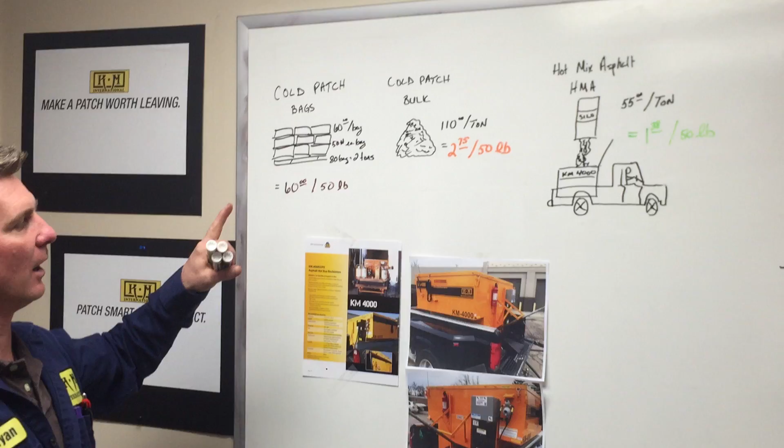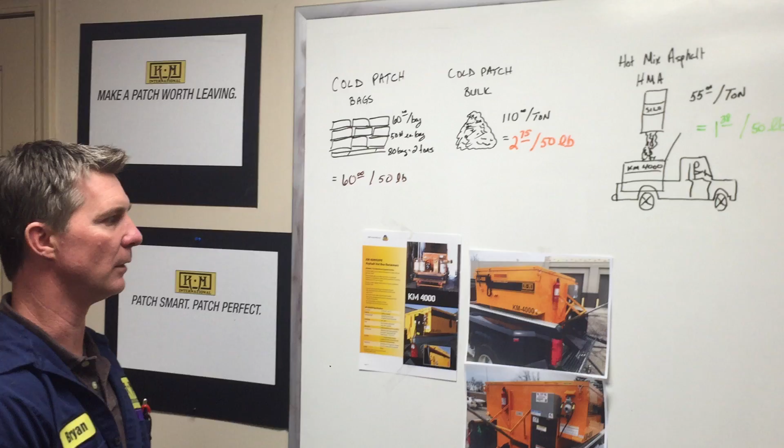Today I'll be using the marker board because 30 years ago we had chalkboards, but now we have marker boards, class. So let's start there. What we've been thinking about is how do we teach or help educate industry professionals, or people outside of the industry, about what they need to know about asphalt and how to get asphalt.

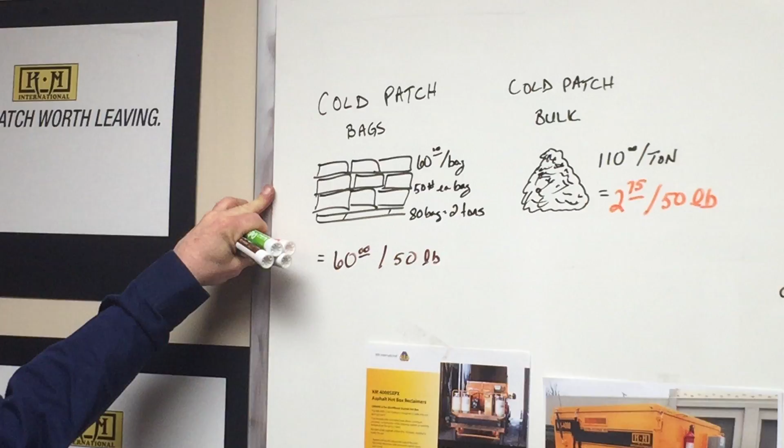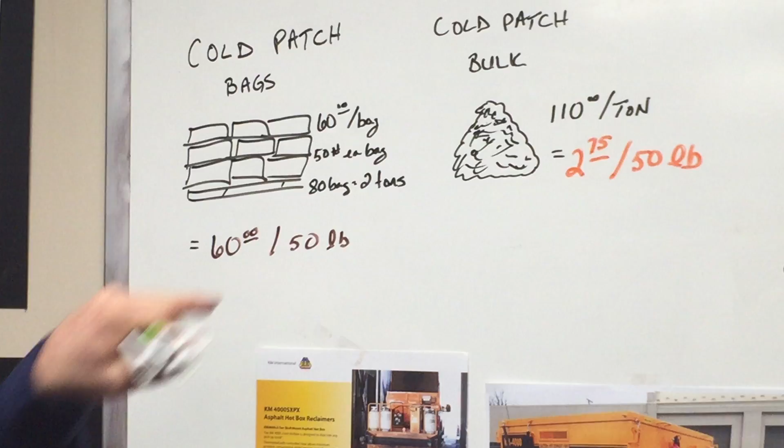Some of the basics: cold patch. Most everybody seems to know about cold patch because they sell it at Home Depot, Lowe's, and other home improvement stores. I don't want to leave anybody off the list - Menards, small hardware stores, etc. On average, a 50-pound bag of cold patch at the store costs you $60.

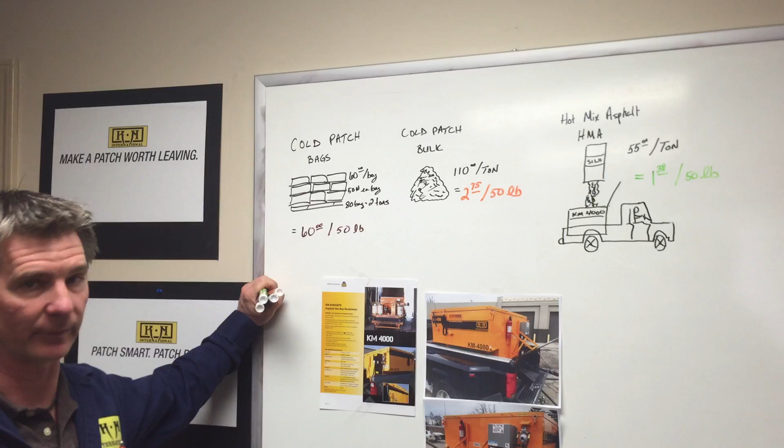Many people don't know that you can buy cold patch in bulk form at asphalt plants - that is, if you know where the asphalt plant is. Most of the world doesn't know where to find the asphalt plant, and most neighborhoods don't want the asphalt plant in their backyard, which lends itself to not being able to find it. But if you can find the asphalt plant, you can buy cold patch in bulk for approximately, here in the Midwest, $110 per ton.

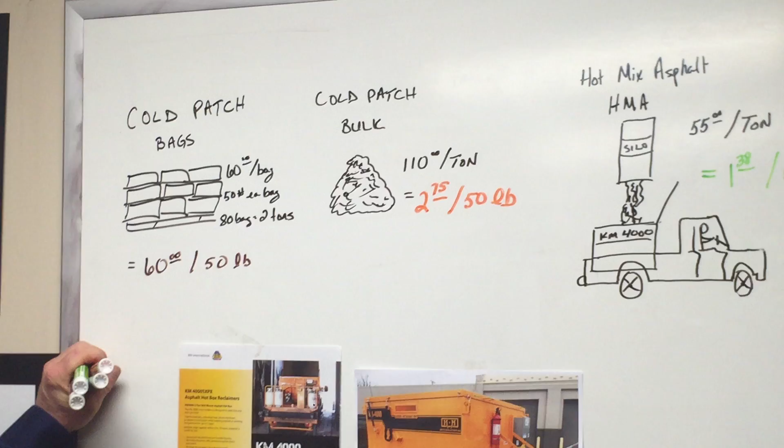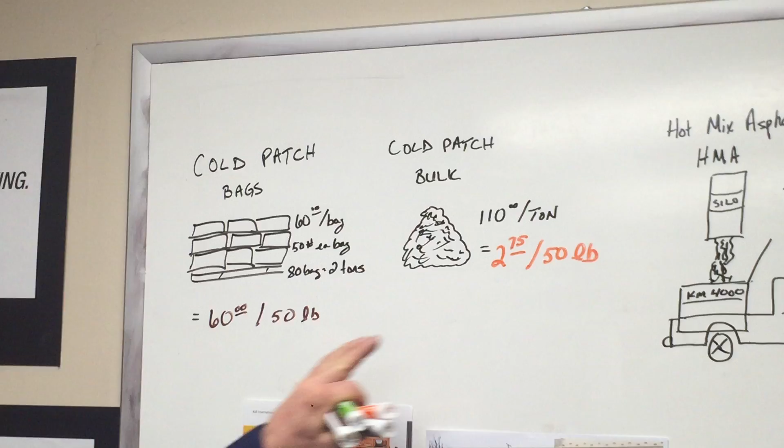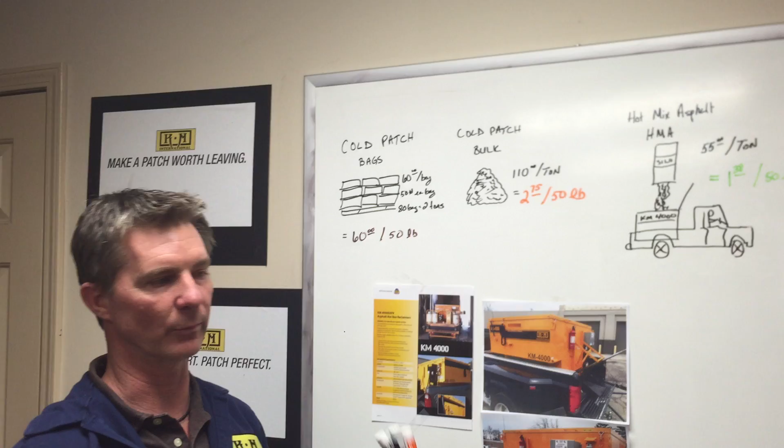We've done the math ahead of time, trying to keep it apples to apples. 50 pounds of cold patch in bulk form comes out to $2.75, significantly less expensive than paying $60 per bag. Of course it's not in a bag here, you're going to need a shovel and a way to contain it - a hotbox. Cold patch is ridiculously dirty, messy stuff. We probably all know that because we've driven through it on the highway, picked it up with our tires, and heard it hit our fender wells.

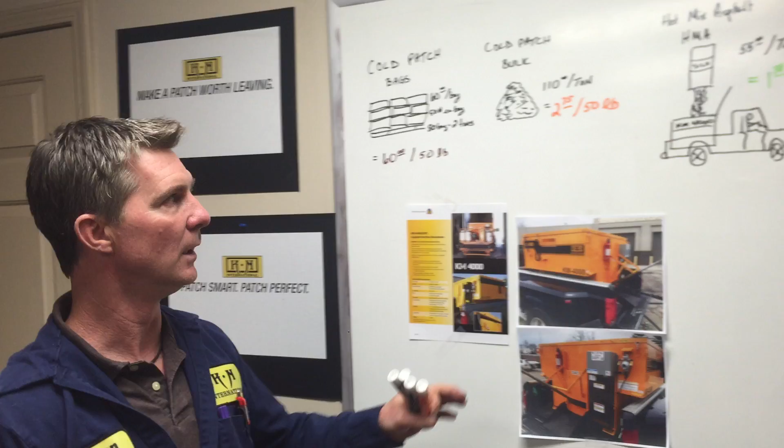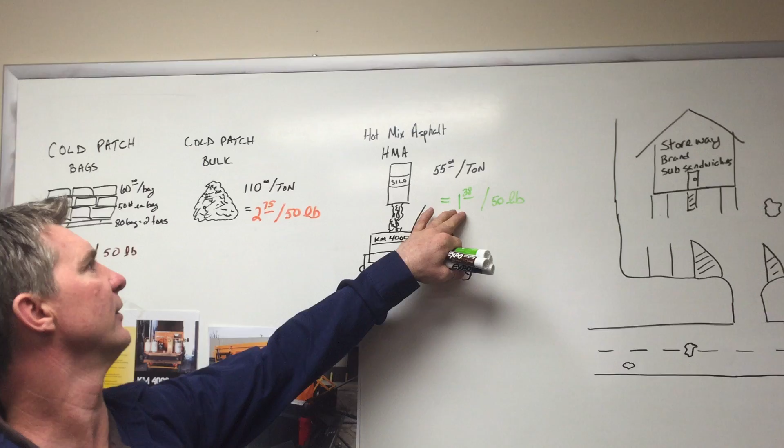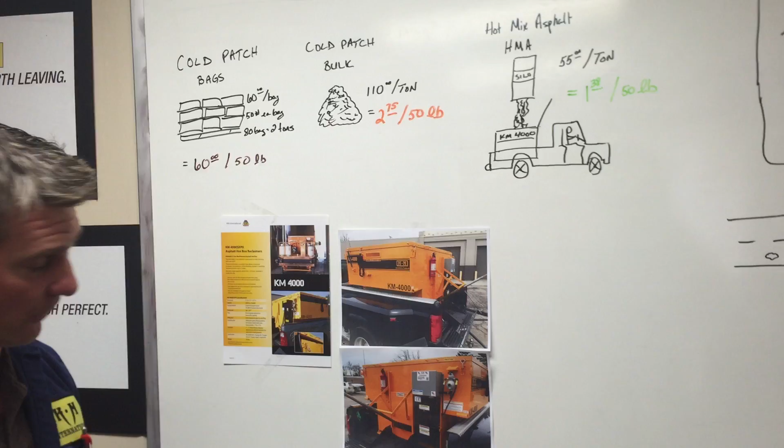As long as we're discussing dollars and cents, we've done the math. If you can find that asphalt plant, and it's running in the summertime and during the season like right now in the spring, you can buy hot mix asphalt for approximately $55 per ton, or $1.38 for 50 pounds - slightly more than half, only by half a penny, the cost of buying bulk cold patch. Again, the difficulty here is: where's the asphalt plant? Not very many people know there are asphalt plants around or where to find them. And then once I find the asphalt plant, how do I buy and haul the asphalt?

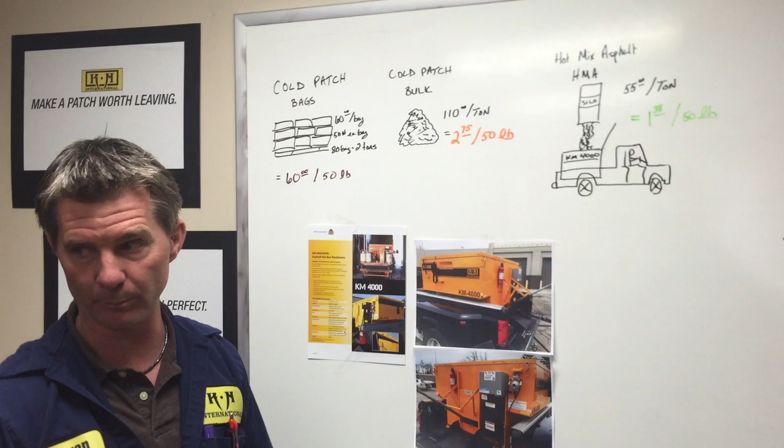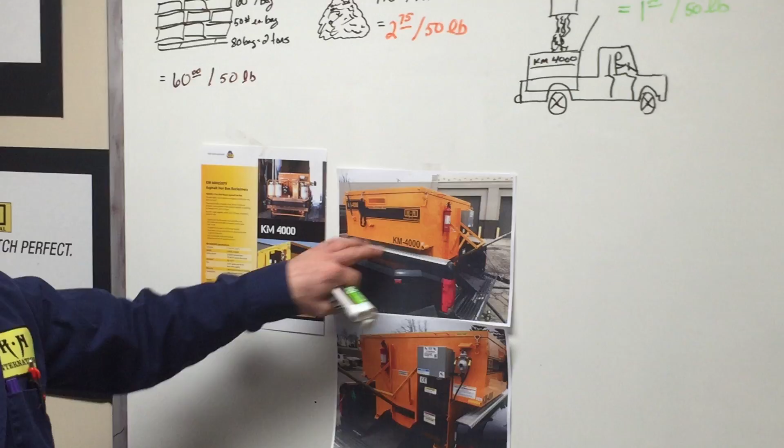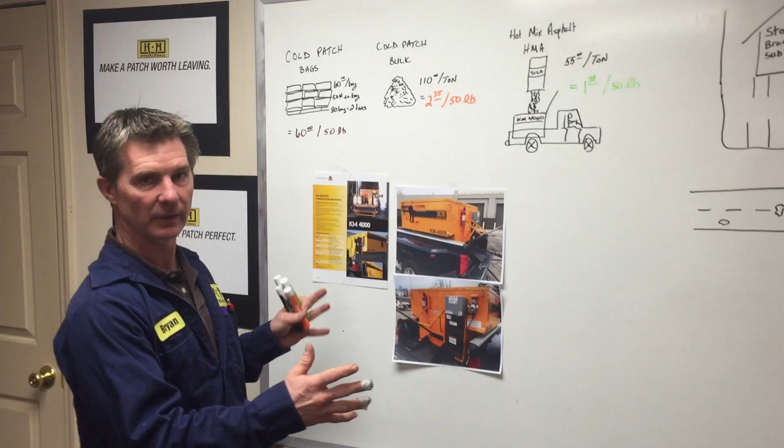Well, that's the problem that we've solved at KM International over the years. Since at least the 80s, to my knowledge, we've been building the KM 4000, a 4-ton asphalt hotbox. Amazingly enough, we failed to show the world how easy it is to get asphalt and get it to the pothole. Can I stop you for one minute, Bryan?

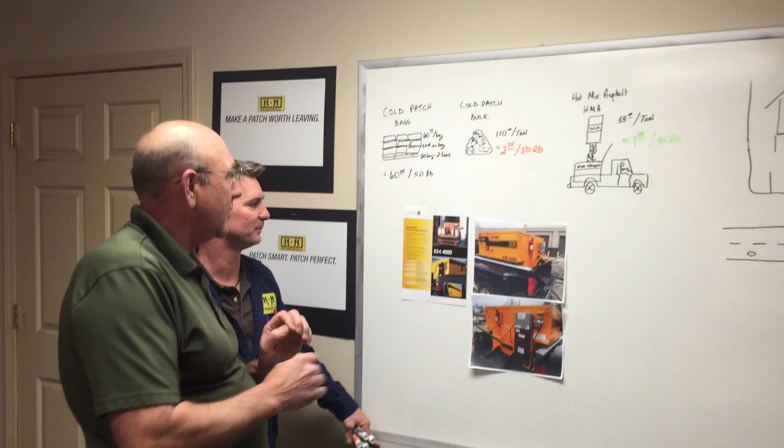Most guys will buy 3 tons if they're hauling it in a truck, use 2 tons, and throw 1 ton away. You're wasting money.

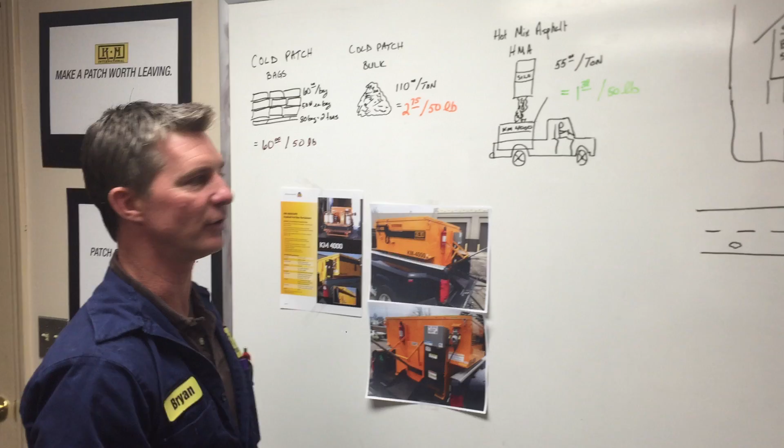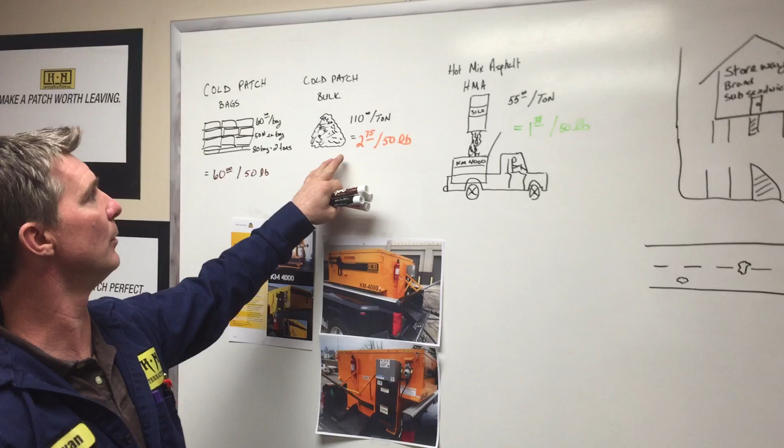So for a simple piece of equipment, our KM 4000 asphalt hotbox, which we took pictures of and put up on the board here, in a pickup truck, a man in a pickup truck with one little 2-ton asphalt hotbox, KM 4000, made here in North Branch, Michigan. We can go get our 2 tons of hot mix asphalt for $55 per ton, or if we wanted to, we could pay a little more and get cold patch and put it into that same asphalt hotbox. Either way, our piece of equipment here in our basic pickup truck gives us the opportunity in the holding reservoir to purchase and transport asphalt to a job site.

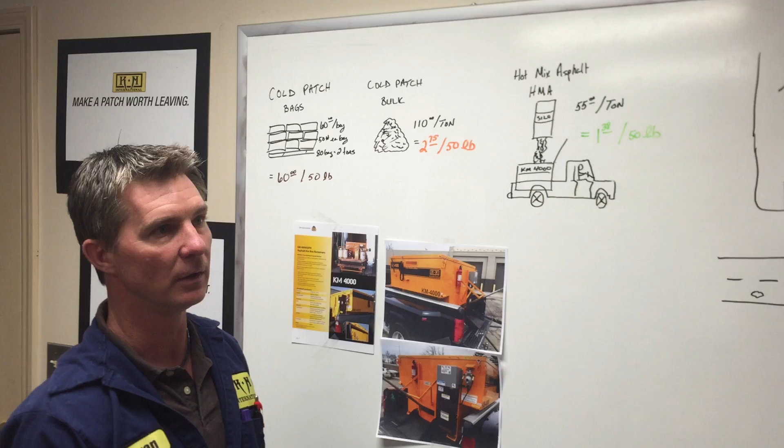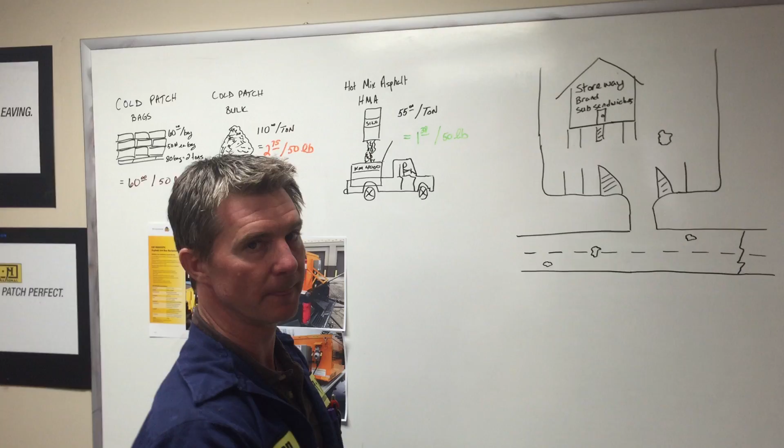So what do we do with the asphalt that generates revenue? We take our asphalt, go to the asphalt plant, purchase our asphalt, and drive over some potholes that have been filled with cold patch many times by the local authorities, counties, and states, or we drive around them.

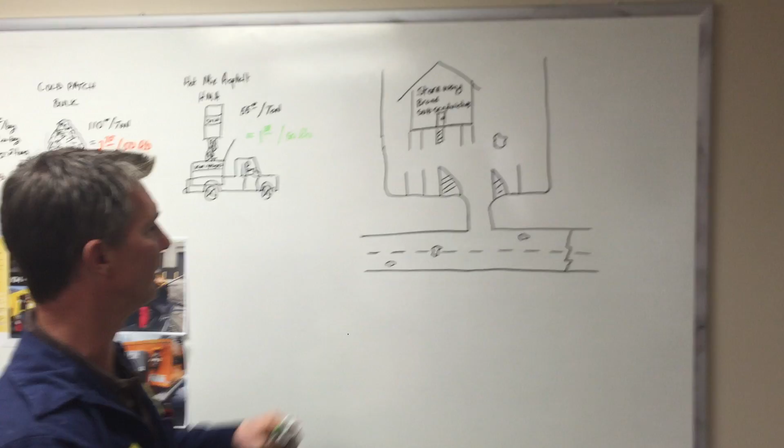We can drive down the road here. What color should I use? Black. This is our truck driving down the road, going around potholes.

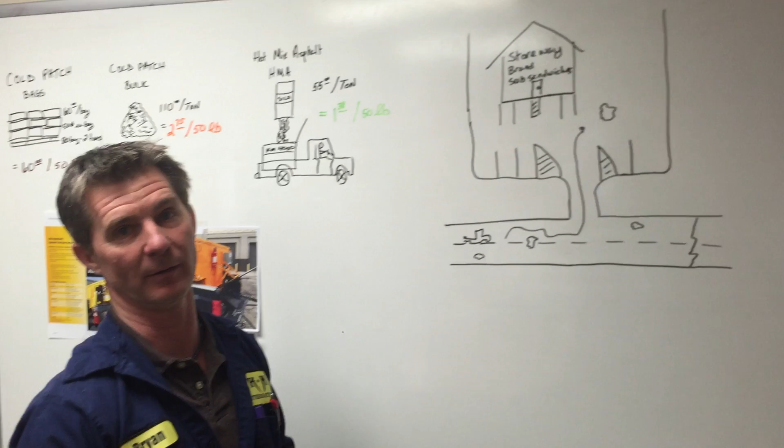And we go to one of our local stores. Here we've gone to Storeway Brand Sub Sandwiches, a very popular sub sandwich maker here in the Midwest. They make delicious sandwiches, but you can see a typical pothole in the parking lot, a job that many of us asphalt guys over the years have approached.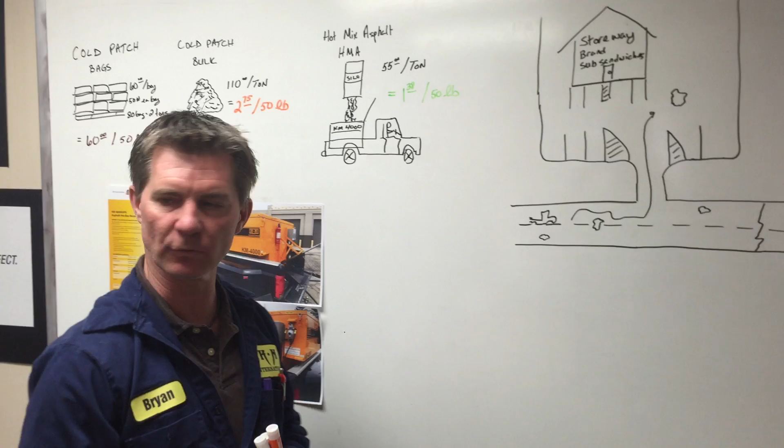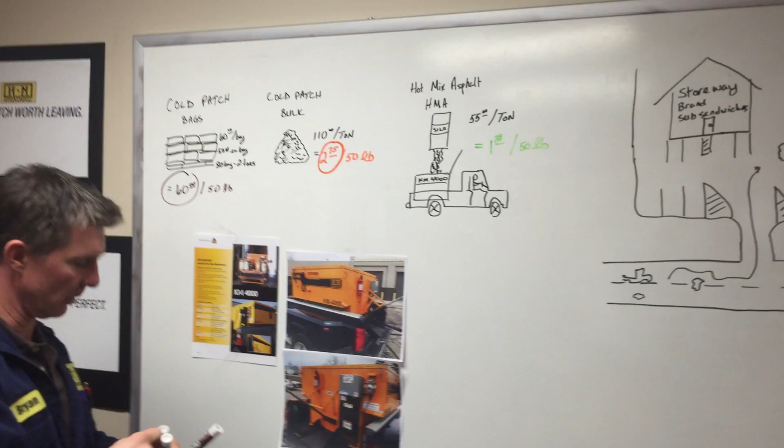To keep things simple, we're going to assume that a standard pothole, let's call it 2-foot diameter, maybe 2 to 3 inches deep, is going to require 50 pounds. One bag of our cold patch at $60, or 50 pounds at $2.75 of our bulk cold patch, or better yet, the more permanent, preferred, and least expensive method at $1.38.

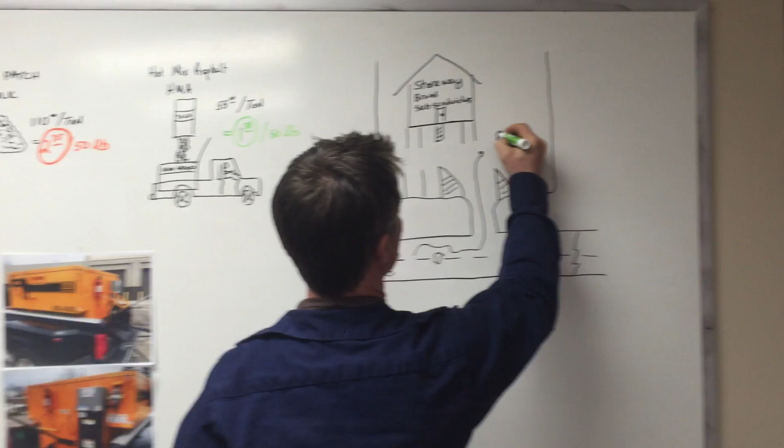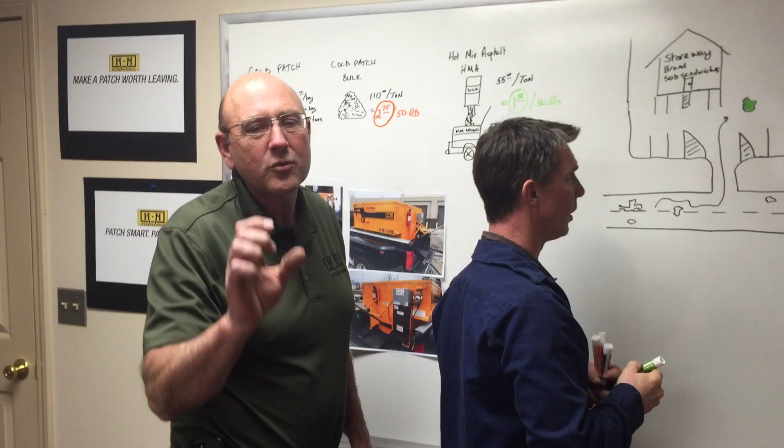We can put hot mix asphalt into our pothole here. Can I interrupt? Yeah, the preferred method is infrared, that's what we do, we sell infrared machines. But this is going to get you out of the box into the parking lot, generating revenue for $1.38 in material, plus some time and a little bit of labor.

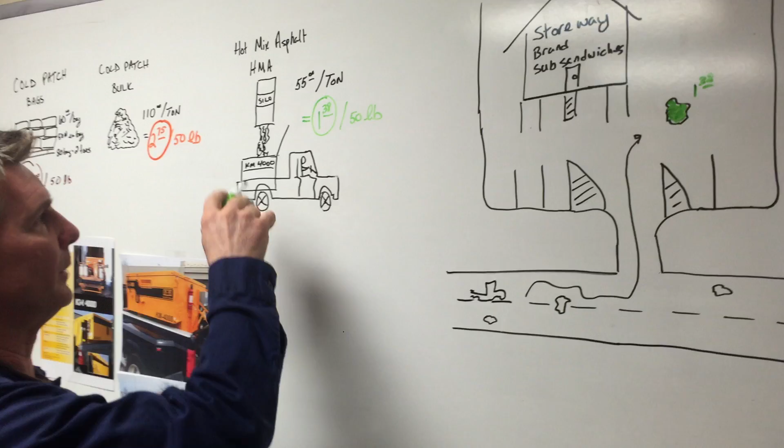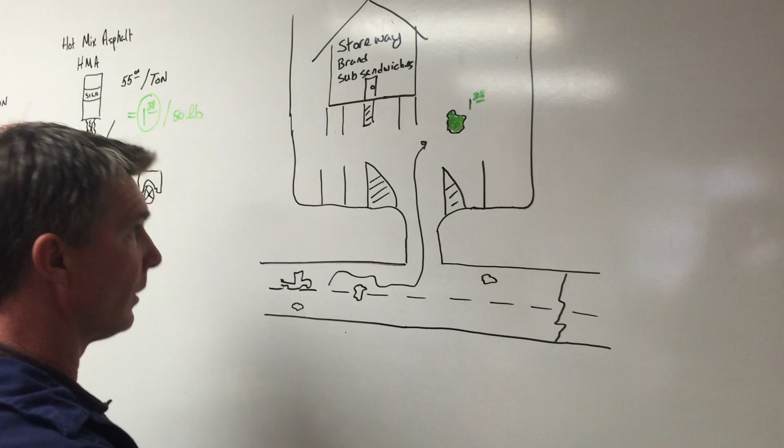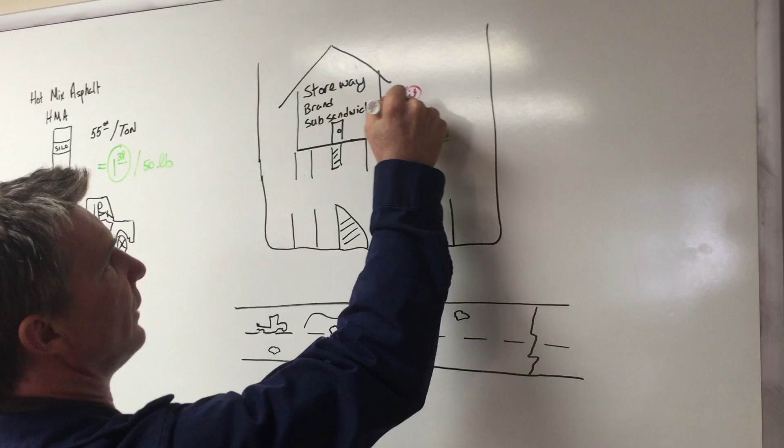You're going to need a shovel, of course, and a way to compact it. But for $1.38 in material, we have filled the pothole for the store owner, making the sandwich buyer happy because they don't trip over the pothole when they drive into the sandwich store, and making the sandwich store owner happy because the customer goes into the store.

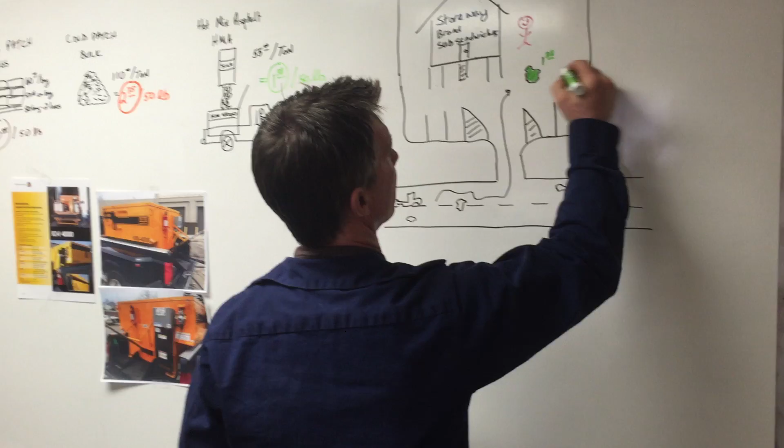And we get, on average, what do you get for a pothole? I would say $100. $50 to $100, keeping it generic because we don't want to compromise, $50 to $100 to repair that pothole. Obviously, I think we can all do the math from there.

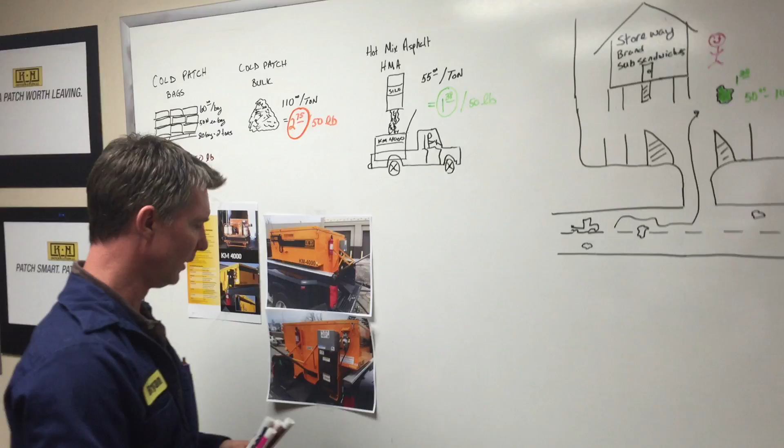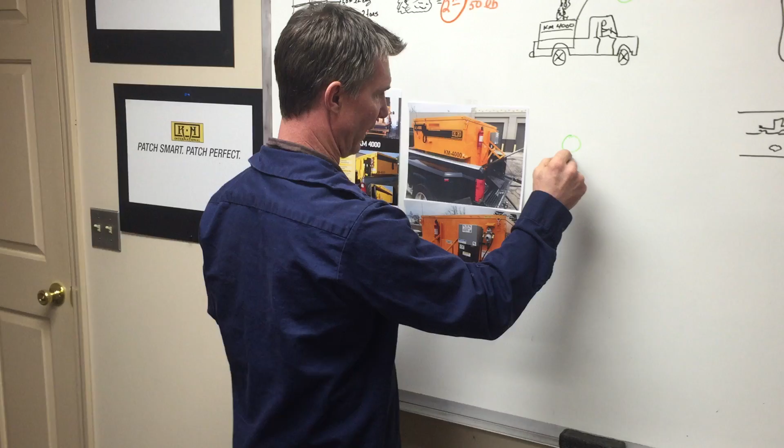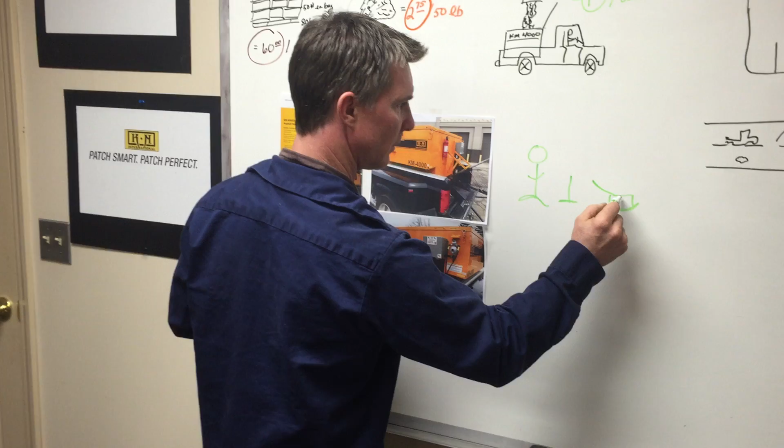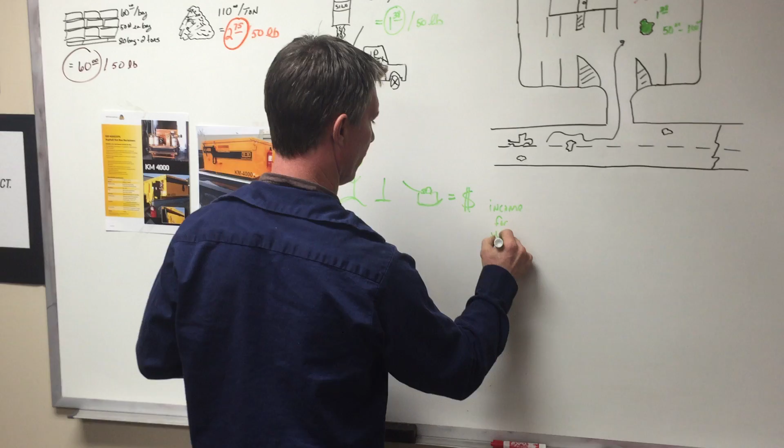So again, it's as simple as a truck, a hotbox, a shovel, a drop plate compactor, a driver, and a compacting device, either a hand tamp, which is going to give you big muscles, or a plate compactor with a little Honda engine on it, or whatever kind, for compacting the asphalt. Put it together and it equals money, equals income for your business.